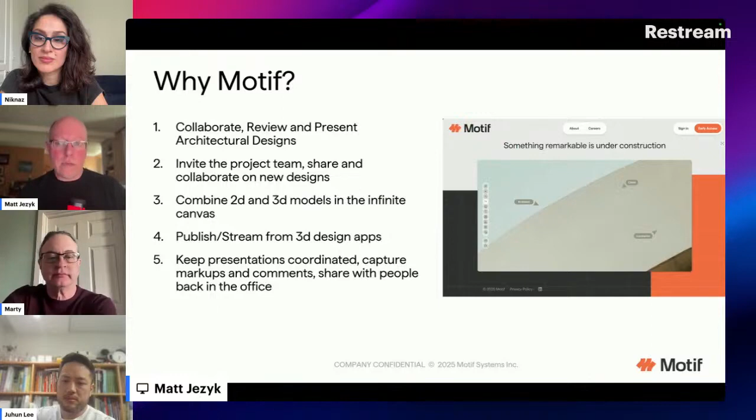So we're building a new platform. This is the first step of many, but what we're doing is focusing on building out better design collaboration, simply from a 2D standpoint first. Simple tools, we'll see in a second, but extending that to work directly in 3D on 3D models that are live linked from the primary design applications.

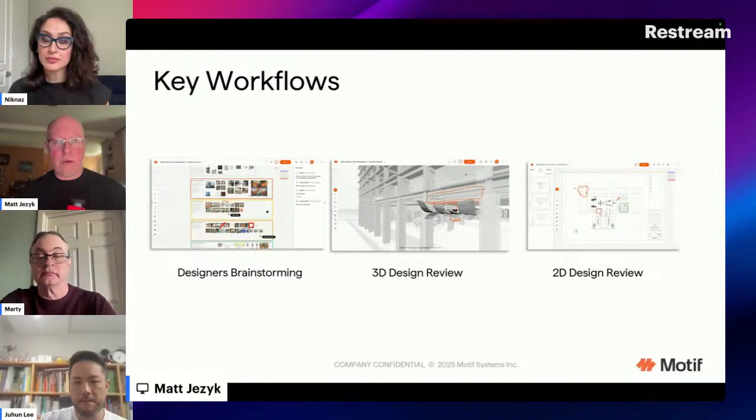But you can sketch on top of them with the same simple tools. You can comment, markup, review, explore different options, all those kinds of things directly in this environment with the same tools. And then also markup sheets, take a set of drawings that you might have to send out 400 sheets to PDF right now and use a different tool. Why not just do that in the same environment here?

So we'll walk through a couple of these workflows. This is what Motif looks like. It's a clean, simple web application that runs in your desktop, in a browser. There's no install, there's nothing else like that. It'll run on your iPad, multi-touch, all those kinds of things.

We have an idea of a project and then boards. So a board is sort of like a workspace that can be shared. This is all inherently collaborative and multi-user.

So here we have Motif. You can notice a really simple user interface, just a tab of about 10 tools on the left-hand side. And all I'm going to do right now is just start a new project and create basically a concept board, like a mood board, looking at precedents and sort of ideas, inspirations.

But you don't have to be a CAD person for this. You don't have to be a computational design person. If you can use PowerPoint, you can use Motif. That's kind of where we're starting from.

But the benefit is that you're in this infinite canvas in 2D. You can create presentations, you can explore ideas, and then more importantly, you can start to collaborate with your peers, right? So you can bring them in to the mix.

Because we've built in multi-user and multiplayer workflows from the very beginning, you can see my colleagues' cursors running around the screen. So anyone can be added to this project as easily as the first time you use Zoom or Slack or any other online tool, where you click the link and something magic happens. That's what we're shooting for with Motif.

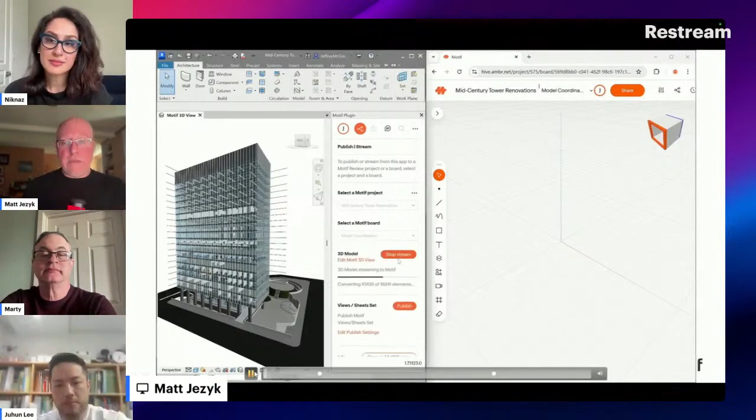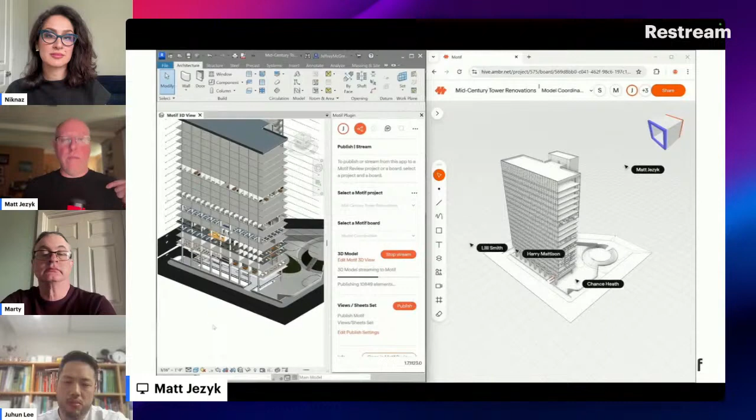Motif is just a little helper watching over your shoulder, and all it's doing is streaming the information on your screen. So what you see is what you get. The view you have in Revit will affect exactly what you're streaming to Motif. So if I add walls or windows or doors, or even just turn off the curtain wall, that will affect what you see here.

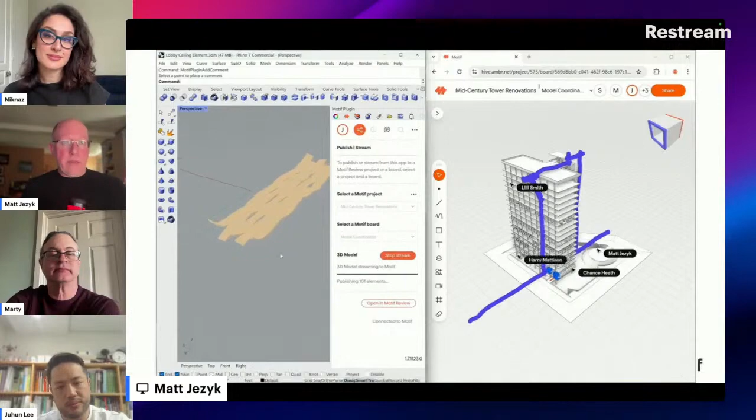At the same time, those same 2D sketching tools I mentioned work directly in 3D. So I'm sketching directly on top of the model, but inside 3D space, not like in Zoom where you're on the picture plane, literally taking a photocopy of it. I'm actually able to interact as you'd expect as an architect or engineer, getting in there to solve real problems in 3D. So that's pretty fundamental: real-time collaboration in 3D with a natural sketching interface.

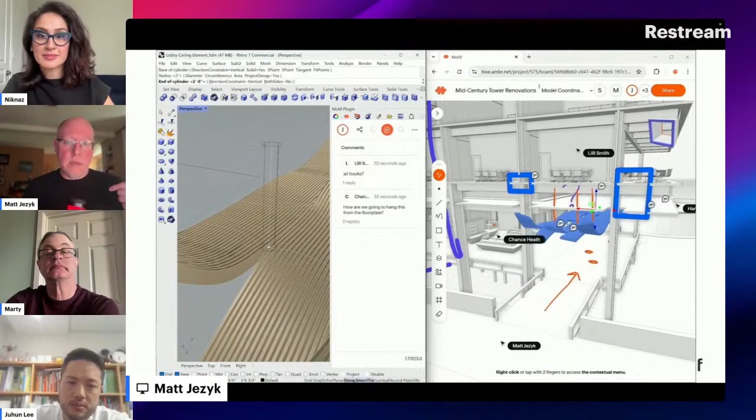In addition, we have other tools - I can stream from SketchUp or from Rhino, in this case. This is a ceiling feature in this building, and the exercise now is collaborating to figure out how to hang that digitally fabricated ceiling from the structure. I can do that directly natively in Motif, have a collaboration session sketching directly in that, and change the source models. Because it's streaming real-time, I can see that geometry change happen immediately back in Motif.

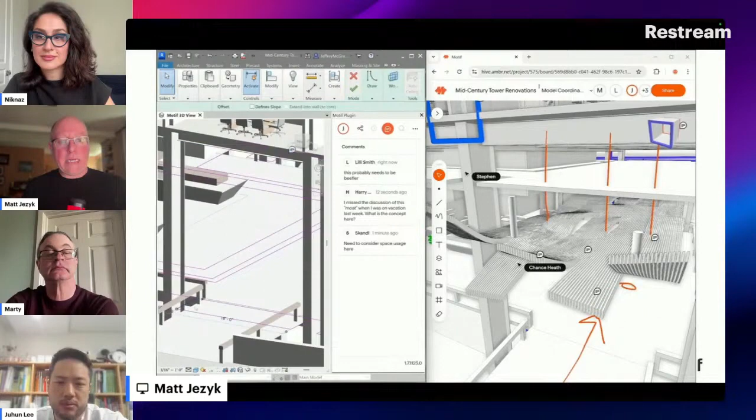Then you see these little comment bubbles. I can have a bidirectional link back to the source that helps people understand what they need to do - hey, add a bracket, change the structural steel, or anything else. So on the Revit side, I'll add a bit more structural steel. Let me pause on that for a second - so the same thing, a real-time change, as soon as that piece of steel drops it shows up, and people can start doing the rest of their work.

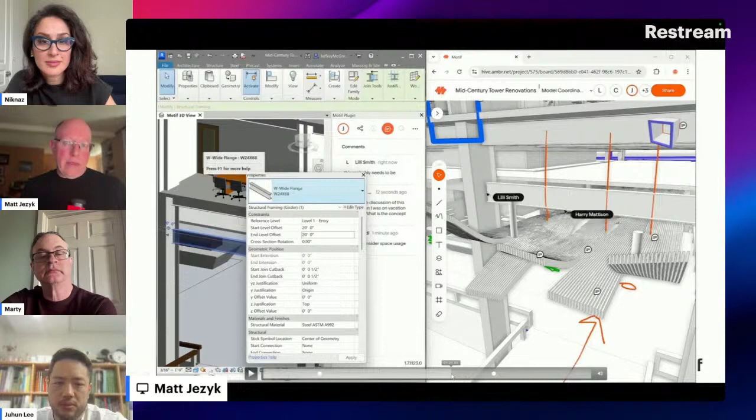So it's not meant for publishing to some central model and reviewing PDF files in a long virtual design and construction process. It's meant to be real-time, interactive, and collaborative, to speed up that collaboration inside a team.

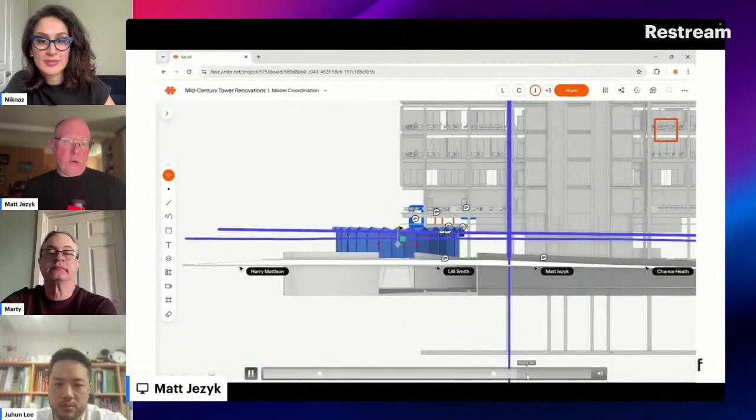This can also work with other models - I just imported a SketchUp model. This is what we call a static asset. I can bring in an OBJ file, or GLB, or GLTF into this mix and aggregate any information you have. So 2D information can be images, PDF files, or SVG, and 3D are the very common file formats we support.

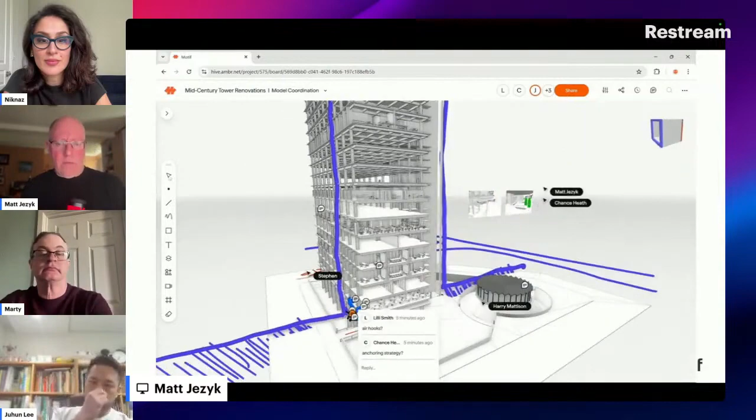And then you're able to work, and really it's like a mashup environment where you can start sketching wherever you'd like. We're trying to bring the joy and the creativity back to this part of the process.

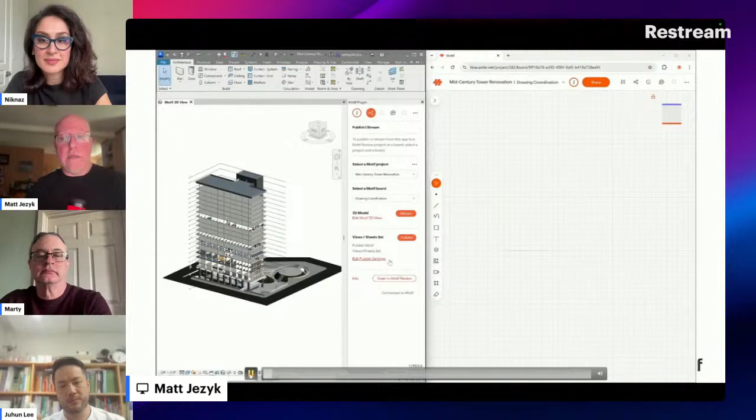So I mentioned it's not just 3-dimensional stuff, it can also be 2-dimensional. Let's take away some of the drudgery and bring some joy back into marking up drawings too. In this case, I'm exporting a sheet set from Revit - I just exported a set of 24 drawings. So instead of dumping them out to a PDF file and putting them in a different tool like Bluebeam, I can bring them into the same environment here.

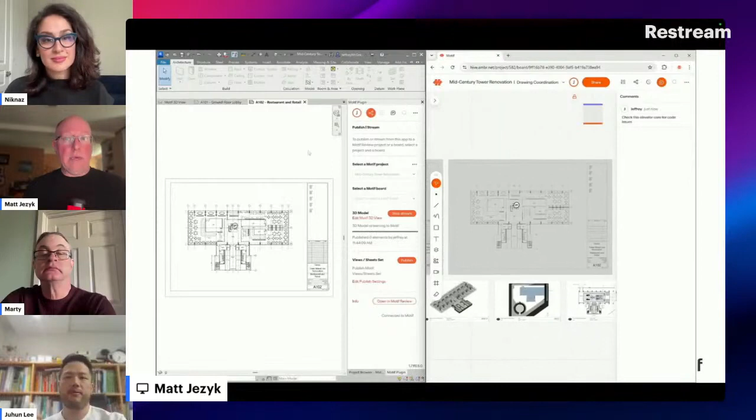Using the same sketching and markup tool set that I use for mood boards and Miro-like things, and also in 3D, I can use that in 2D just to mark up sheets. The comments also go back to Revit, so the draftsperson or architect working on those drawings can pick up those changes directly. That's pretty significant. The next time they publish, because we have that infinite history, those changes are essentially slipstreamed in - that sheet has been reissued, and we track all of that in one spot.

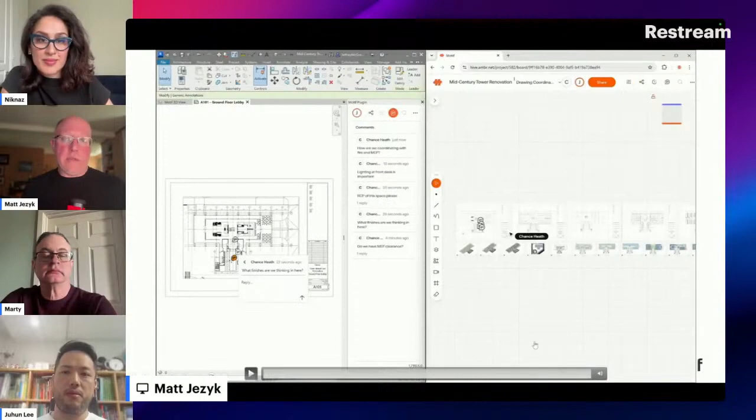So that's some of the fundamental things with Motif as a platform. And the last part of this is using it in the same way that one of the joys and essence of Revit was that things were real time and coordinated. Everything was up to date. That same philosophy holds true in Motif, where this is a live view of whatever models you have.

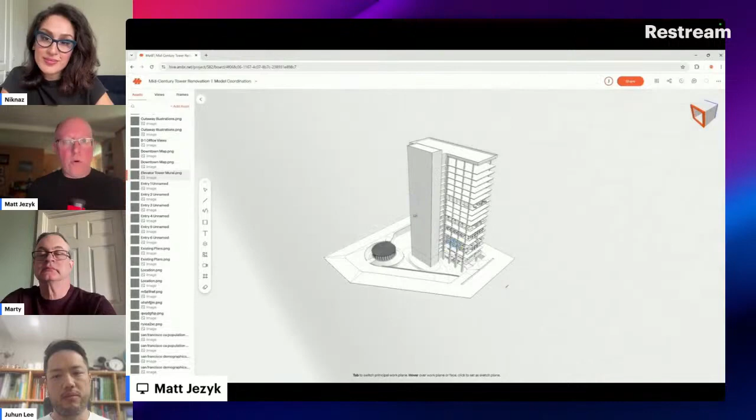I can make views of those, right? So like you can in SketchUp or Revit, you can switch between different live views and use them as a storytelling technique. Architects are storytellers, so you can walk someone through the model. But more importantly, as you change something in the model, all of those views update in real time.

So if I just add something like this mural, you can see the little thumbnails update. And as I navigate through, all those changes are up to date. So it's never like, oh, I changed it in one spot and it didn't get picked up. Of course, it's going to be the same.

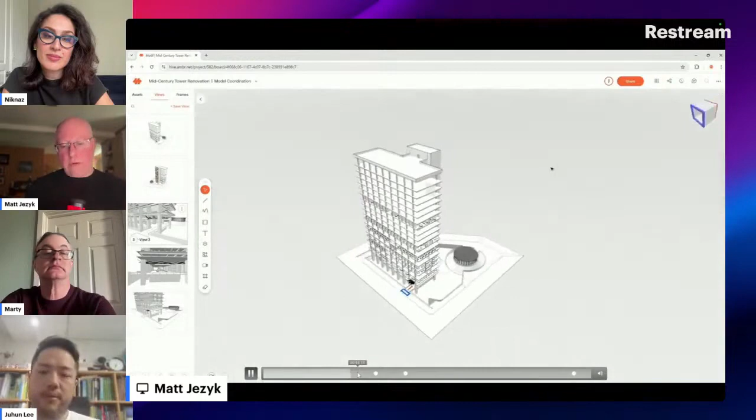Where that gets significant is when you start to pull the different design options or ideas that you have together and make a presentation out of it. So in this case, if I looked at four different options for curtain wall, I could have those in a board, one of these infinite canvases, and start to pull together basically presentation information.

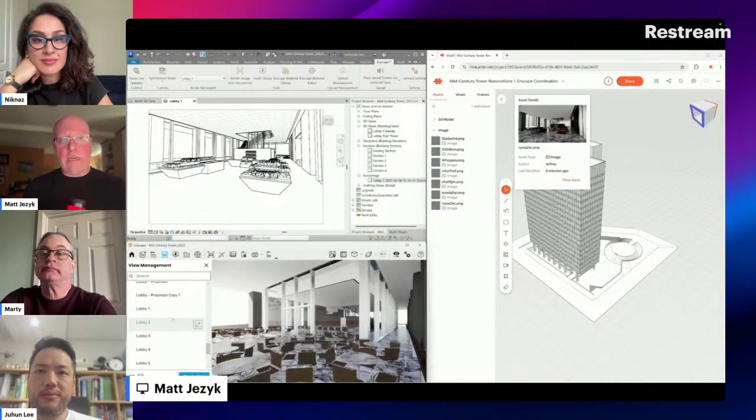So I might have an Enscape rendering, for example, that's coming from that. If I change the Revit model, then the Enscape rendering updates and we track that information too. So all the different ideas that you have can be run through Motif and then assembled into a presentation.

So here we're showing the frames feature that we have, which is basically like sheets in Revit or PowerPoint slides. You can take that information that's consistent - all your renderings, all your plans, sections, elevations, and also the 3D views - and put them into a presentation and be assured that they're always up to date.

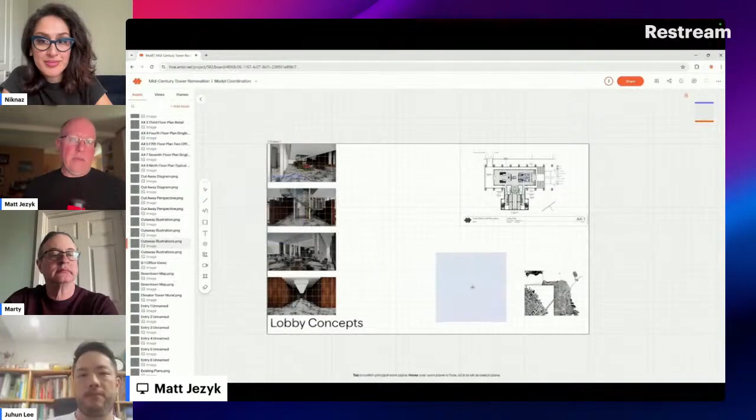So you're minimizing that invisible work of like, wait, did I update that rendering? I thought I slacked that to you last Friday. None of that happens anymore because all that information is there in one online source, and more importantly, it's linked back to where the information started from in whatever platform that is.

And because it's an online tool, you don't have to worry about sending out PDF files. You could literally send a link to this presentation to a client or whoever you'd like to share it with, and be assured that they can see this information and mark it up or use it for the presentation. And it's always going to be consistent.

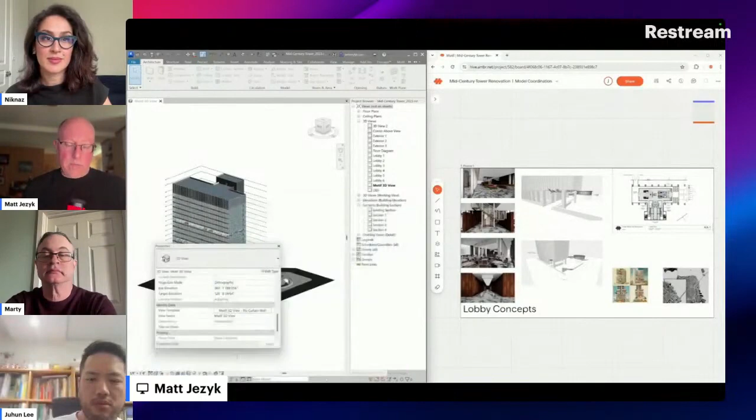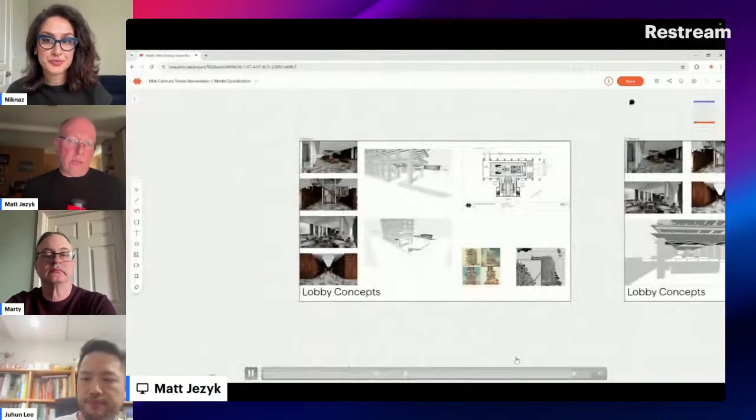So those are the key things that we're working on in Motif. At this point, we're trying to build on top of some of the concepts around BIM and extend them to the larger design team, and also build an open platform that could link into things like Schema or other newer tools, in the same way that we just showed on top of Revit and Rhino.

So we're trying to be the kind of integral source that is a new alternative in this space around BIM and the way we advance architectural engineering design. And those are some of the core concepts.

So like I said, we just launched. We're updating the software very, very frequently - about every month or so we'll have a new version out. But these are the core concepts that we're working on. So thank you.

Wonderful, thank you so much. Congratulations on the launch. Now everyone is talking about Motif, and it was wonderful to see it firsthand how it works. So I'm just curious.

So it creates the connection between all this software, and you can also build models and draw 2D drawings inside Motif as well, right?

Yeah, so we have drawing tools that we're building out. You can see them - there's just normal lines and rectangles and freehand tools. The boards that we have are real world size, so they know what model units you're in. So you could draw out a space plan, for example. We don't have a full creation environment set up to make walls, windows and doors yet, but we're building out the fundamentals of a new platform.

Amazing, thank you so much. Very exciting - I use Figma and Miro almost every day. Oh great, so this is very exciting to have it for architecture.